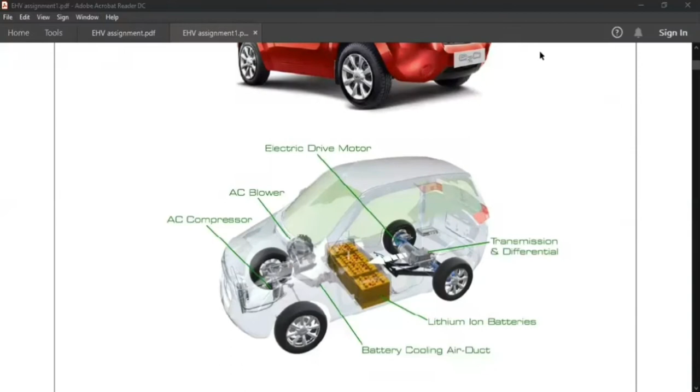The diagram shows the basic arrangement of major components in the vehicle. Starting from the front, we have the AC compressor used for air conditioning. This compressor is powered by the main battery itself and is used basically for air conditioning of the vehicle cabin.

Moving ahead, we have the main lithium ion battery pack along with the auxiliary battery, which is situated almost below the driver and front passenger seats. It has cooling jackets around it from which air passes through the air duct as shown in the diagram.

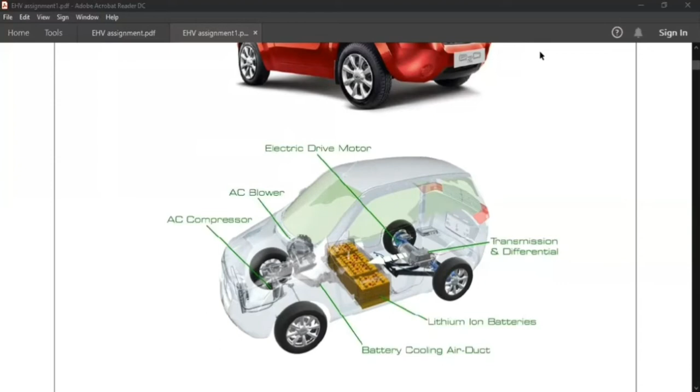Coming to the traction motor, as it is quite evident from the diagram, E2O is a rear-wheel drive vehicle. The traction motor is mounted at the rear axle along with the transmission and differential. The white arrow in the diagram shows the direction of energy transfer in case of regeneration mode of the motor.

Coming to the basic specifications of the vehicle, on fully charging the main battery, E2O ideally returns a range of 140 km. The standardized consumption of the vehicle is 88 watt-hour.

Talking about the Revive feature, it is a patented technology by Mahindra. In case the vehicle runs out of charge, this feature can be activated by contacting Mahindra or by using their app, which will activate an additional 5 to 8 kilometers of charge for the vehicle, and the vehicle can safely be maneuvered to the nearest safe stop.

As standard, a charge of around 5 to 8 kilometer traction power is provided by the Revive feature. It is a hatchback with a seating capacity of 4 people.

E2O Plus doesn't use any major transmission. The power is delivered directly by the motor and therefore known as direct drive. It has two forward gears, one for normal driving and another for boost mode to get extra power.

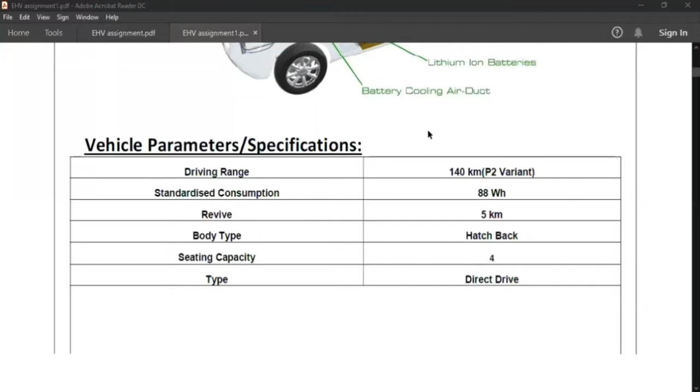Coming to the dimensions, the table shows the basic dimensions of the vehicle. As E2O Plus is a hatchback, the length has to be less than 4 meters, which in this case is 3590 mm. Width of the vehicle is around 1575 mm and height is 1585 mm.

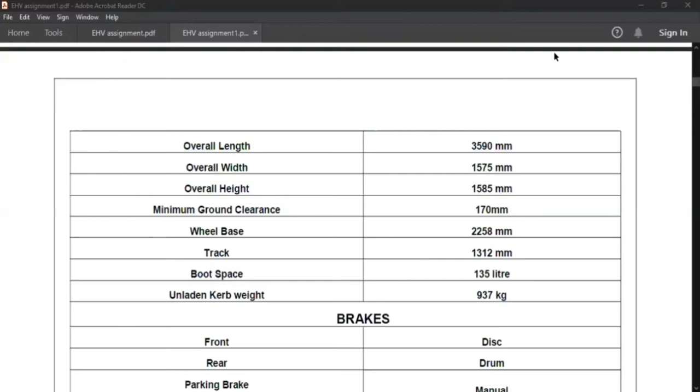Both width and height are almost the same, or at least comparable to each other, which indirectly results in a boxy design of the vehicle. The ground clearance is pretty decent, at 170 millimeters. Wheelbase, that is the distance between the front and rear wheels on either side, is 2258 millimeters.

Track width, which represents the distance between the front two wheels, is 1312 millimeters. Boot capacity available is around 135 liters and the unladen curb weight is 937 kg.

Coming to the braking performance, E2O Plus is equipped with disc brakes in front and drum brakes at the rear. The top speed of E2O is around 80 kilometers per hour, and therefore only one set of disc brakes in the front are sufficient to provide braking instead of using disc brakes on all four wheels.

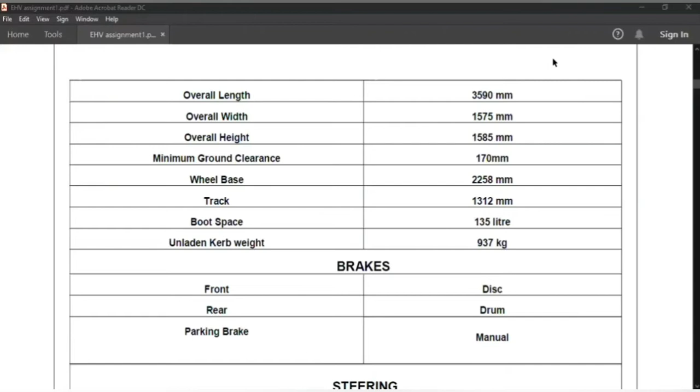It is also equipped with a manual parking brake, commonly known as a handbrake, which can be applied simply by pulling a lever. Coming to the steering, it is an electronic power steering unit. It operates on a simple rack and pinion arrangement along with a motor that supplies torque to the steering column, which assists the driver in turning the steering wheel.

The turning radius of E2O is 4.35 meters, which is quite a crisp figure and is an absolute advantage for the driver to maneuver the vehicle in city traffic and while taking turns. Next, we come to the suspension of the car.

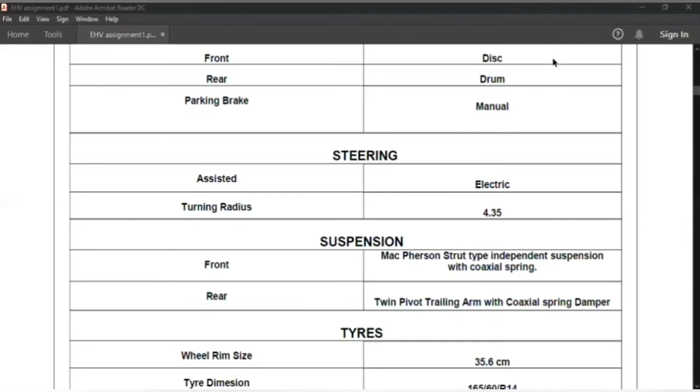On the front side, E2O is equipped with McPherson strut type independent suspension with coaxial spring. McPherson strut is the most common and widely used suspension setup for the front of the vehicle. Its versatile operation makes it a perfect choice to be used in passenger vehicles.

The rear suspension comes with a simple set of trailing arms, which means that the suspension linkages are directly mounted between the pivot point and the rear axle. This setup is accompanied by coaxial spring dampers.

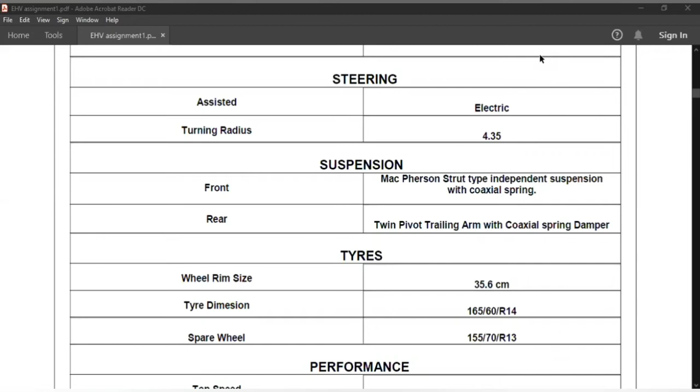Next, we have tires. E2O Plus comes with a standard rim size of 35.6 centimeters, which is around 14 inches. The code 165/60R14 means that the nominal width of tire is 165 millimeters, height of the sidewall being 60, and rim size being 14 inches. The spare wheel is a smaller size wheel with 13 inches rim size.

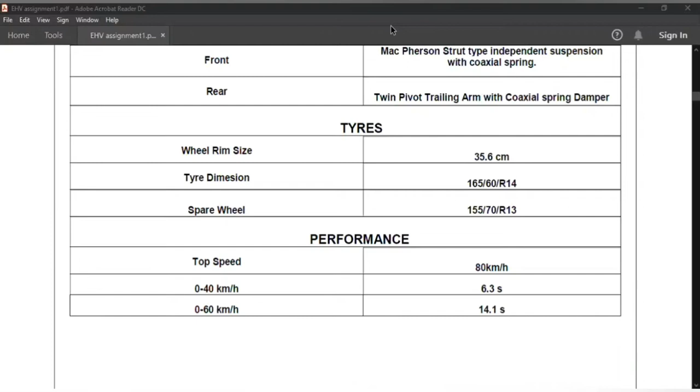Talking about the performance of the vehicle, the maximum speed achieved by E2O is about 80 km per hour. 0 to 40 takes about 6.3 seconds, while 0 to 60 kilometers per hour takes 14.1 seconds.

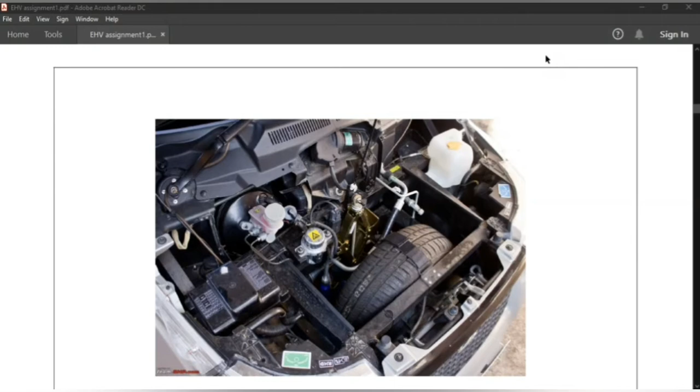The diagram shows the major components under the bonnet of E2O Plus. Due to the lack of space at the rear because of the presence of traction motor, the spare wheel is mounted under the bonnet of E2O Plus. Apart from the spare wheel, the major component that can be seen is the air compressor.

Now coming to the electronics of the vehicle, first we will talk about different voltage levels operating in the vehicle. There are mainly three different voltages operating. The main battery gives an output of 48 volt DC, whose main function is to power the traction motor. Apart from traction motor, these voltage levels are also used for the input supply to the compressor.

Next is a 12 volt DC supply provided by the auxiliary battery. This volt is most widely used in the vehicle electronic components, as most of the auxiliaries operate on 12 volt only. Third one is 230 volt AC supply, which is required for AC charging. 230 volt is the standard output of the plugs that are present in our households.

The auxiliary battery used in E2O Plus operates at 12 volt and has a capacity of 20 amp hour, while the main battery operates at 48 volts and has a capacity of 210 amp hour.

Before moving forward, I would like to have a small discussion on battery capacity. A battery's capacity is the amount of electric charge it can deliver at a rated voltage and is physically determined by the size or the volume of the electrodes that are used in the battery. The unit of measurement of battery capacity is amp hour, which is the product of current and time.

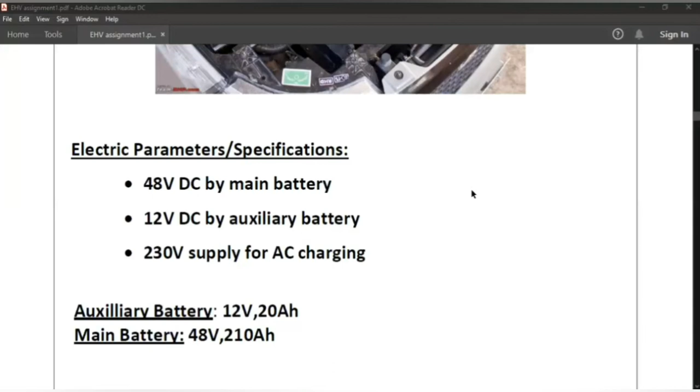Now coming to the traction motor of E2O Plus, it employs a three-phase squirrel cage induction motor for the main purpose of providing traction to the vehicle. The simple design of induction motor and absence of permanent magnets makes it a good choice for EVs. But due to the bulky weight and heat losses, it is quite inefficient and is rarely used in the current market scenario.

The peak power of motor is 19 kilowatt obtained at a speed of 3500 rpm, while torque is 70 newton meter obtained at 1050 rpm.

The main battery has a capacity of 210 amp hours, and as discussed before, in a generalized way, it can be said that the battery has a capacity to provide 210 divided by 20, that is 10.5 amps for 20 hours at its rated voltage, that is 48 volts, at around 20 degrees Celsius.

Just like most of the EV manufacturers, it also employs lithium ion technology in the battery because of its fast charging capability, long life, and high power density. The main battery contains a total of 16 modules, and each module further contains 64 cells.

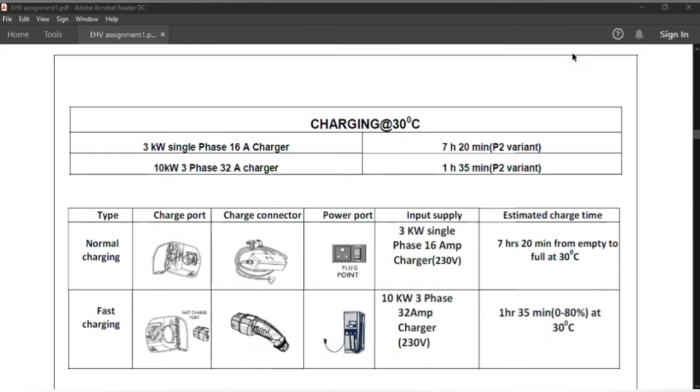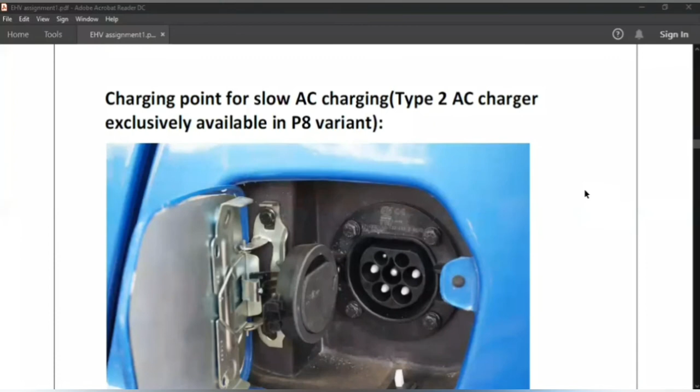Now let's have a look at some of the charging points that are available in E2O Plus. This is the charging point for slow AC charging. This is available only in the top of the line P8 variant. This is a Type 2 AC charger.

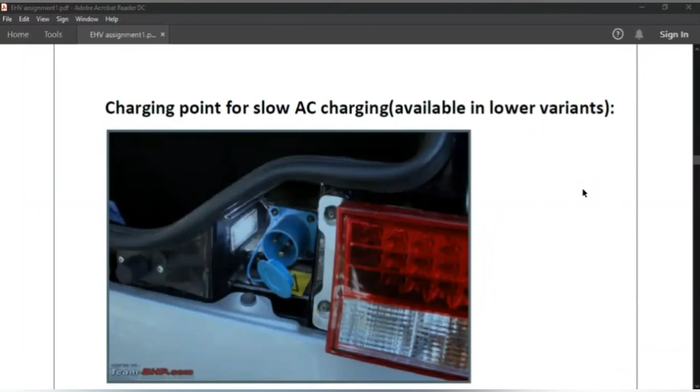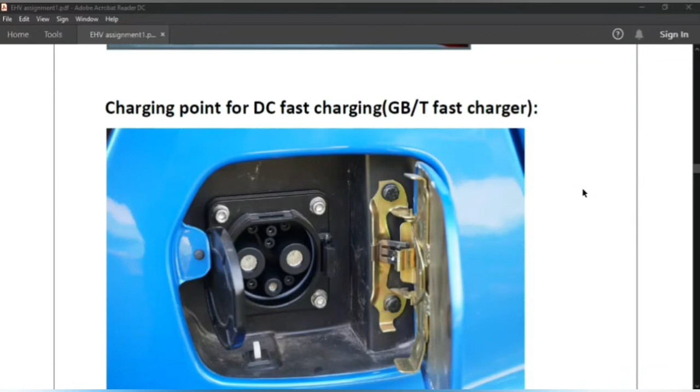This is the charging point for slow AC charging available in lower variants. This charging point is for DC fast charging. This is available in all the variants and it uses a GB/T fast charger.

Mahindra has also earlier introduced solar charging stations and named them as Sun2Car technology. These are standard charging stations which use solar energy to charge the vehicle. These are available in three different options.

The first one is the direct solar charging, also known as Sun2Car DC1, due to the fact that DC power is supplied to the vehicle. It consists of four solar panels, each with a maximum output of 250 watts, making the total output of the system as 1 kilowatt. The user plugs the car directly from the solar panel's DC power source DC charging point. This system generates almost 4 to 6 kilowatt hour on a sunny day and can charge the battery almost up to 50%. It is ideal for corporate parks where electric vehicles can be parked and charged during office hours.

Second is Sun2Car AC1 solar and grid charging. This system consists of solar panels, electronics for power management, and an inverter for conversion of DC power to AC. In this setup, the system supplies power into the local home grid during daytime. The car is then charged from the grid at night or during the day only. This is also called grid-tied solar charging system. The car is charged from a normal 15 amps port and it is ideal for use in an individual house.

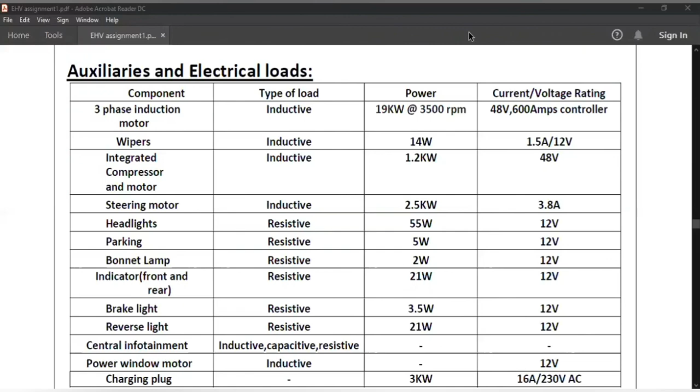In the end, we have a brief discussion about converters that are used in E2O. E2O uses one DC-AC converter for conversion of 48 volt DC supplied by the main battery to AC input required by the induction motor. It also employs two AC-DC converters. One is a unidirectional converter used in charging to convert AC power supplied to the DC power for charging battery. Another one is a bidirectional converter used in regenerative braking to convert AC power produced by the generator to DC power for charging the battery.

It also employs DC-DC converters as the batteries produce a fixed voltage, while there are many components working at different voltage levels. So that was all the info that I could extract for Mahindra E2O Plus electric vehicle.